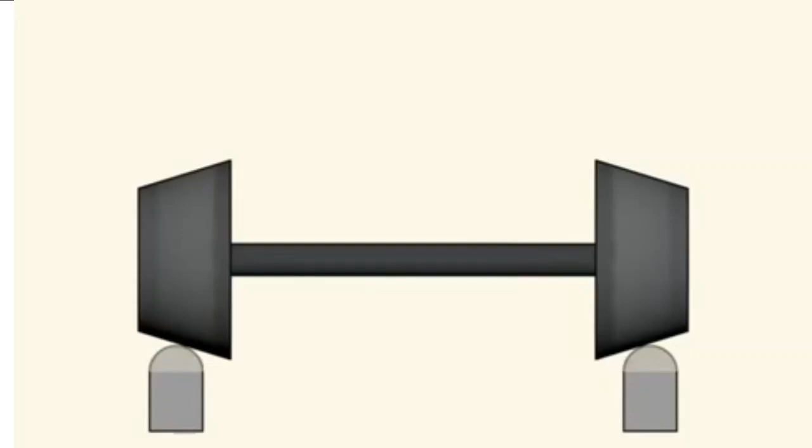Now we will see a video showing what will happen if coning of wheels is not done, and what the result will be if it is done. We can see that if the rails are placed flat, these are the rails.

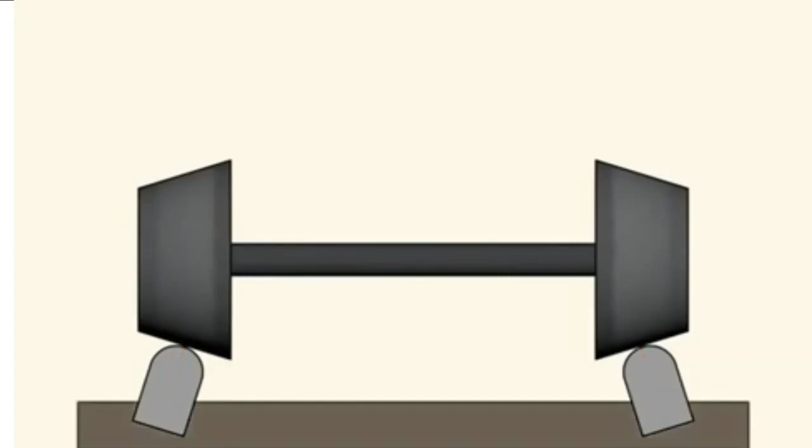If the rails are placed flat, the wheels will fall off and slide off the track. In this figure we can see the axle, the wheels, the wheel flanges, and the wheel treads.

We can see that these wheel treads are given a slope of 1:20. If coning of wheels is not done and only flat wheels are used, at the turns the train may slip off from the track. By coning the wheels, the train stays on the track, takes a smooth turn, and comes back to its original position, maintaining the central position with respect to the track.

So wear and tear of the rails will be minimum if coning of wheels is done. At the turn, the outer wheel is required to take a longer diameter compared to the inner wheel.

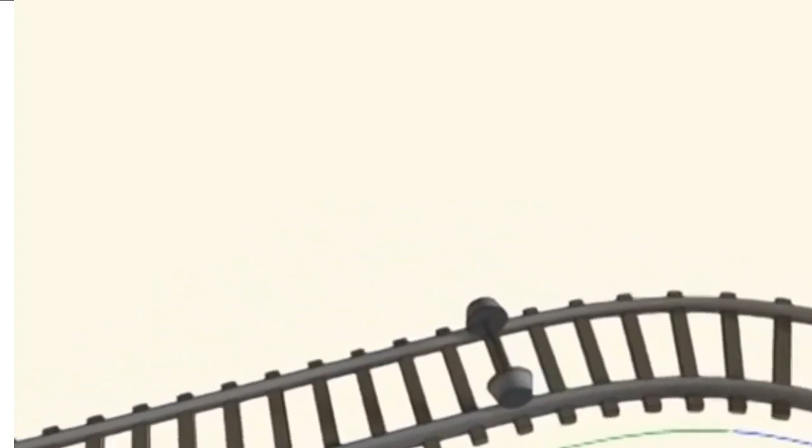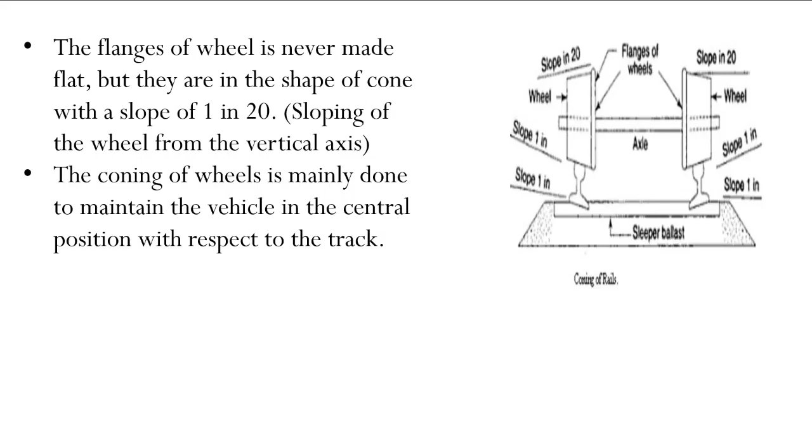Now we will move towards the tilting of rails. We have seen that the rails are not kept flat but tilted inwards. For this method, an inclined base plate is used, inclined with a slope of 1:20, similar to the cone surface of the wheels. What will be the advantage of tilting these rails?

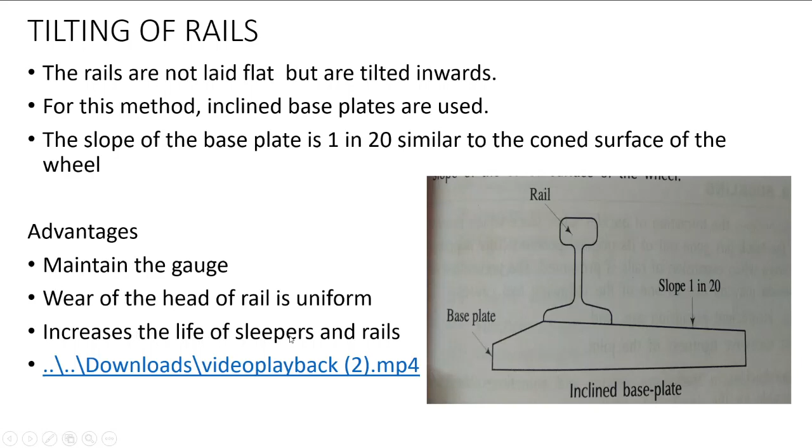The first advantage is that it will maintain the gauge, that is, the inner distance between the inner faces of the rails. The wear of the head of the rail will be uniform if a base plate is provided sloped at 1:20, and it will also increase the life of the sleepers as well as the rails.

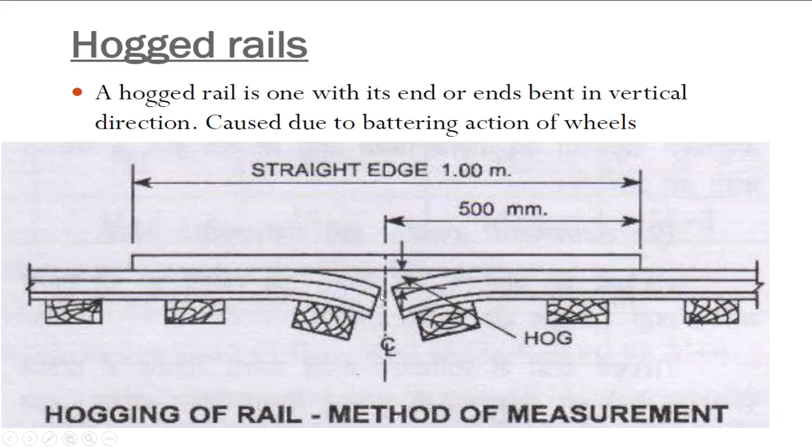So what are the causes of hogging? Why can the hogging effect be seen? It is due to loose packing under the joints and loose fish plates. The hogging effect can be seen in between the two rails, where the rails are attached to each other using joints and loose fish plates. So if the packing between them is very loose, the hogging effect can be seen.

So hogged rails are removed and replaced by new rails. This effect can be eliminated by directly replacing these rails with new rails. Then, second, deflected ends can be brought into their original shape and size by welding.

The second method of reducing hogging is that deflected ends can be brought to original shape by welding. Then deflected ends of the rails are cut off and fresh holes are drilled for fixing the fish plates. The hogged rails can be made into position by cutting the deflected ends of the rails, then freshly making holes using a driller, and then fixing these two rails with a fish plate.

Then the bent or deflected ends of the rails can be straightened. These are the remedies that can be used to prevent hogging, and also, if hogging has occurred, how it can be eliminated. These methods can be used.

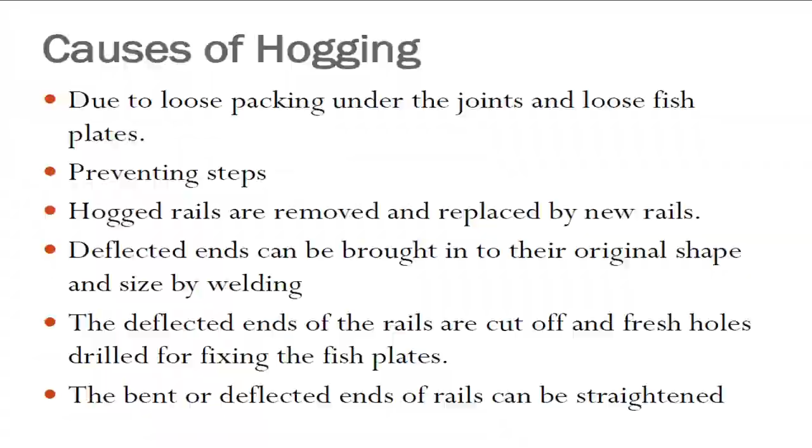So now we will move towards what is wear. We have seen that if coning of wheels is not done, the rails get worn off. So when the axle loads are abnormally heavy and the train moves at a very high speed, concentrated stresses exceed the elastic limits, which results in the wear and tear of the rails.

Depending on the location and position of wear, they are classified as follows. On the basis of location: wear occurs on sharp curves, on gradients, on approaches to the station, and in the tunnel. On the basis of the position: wear on the head of the rail, wear on the ends of the rail, and wear on curves of the rail can be distinguished.

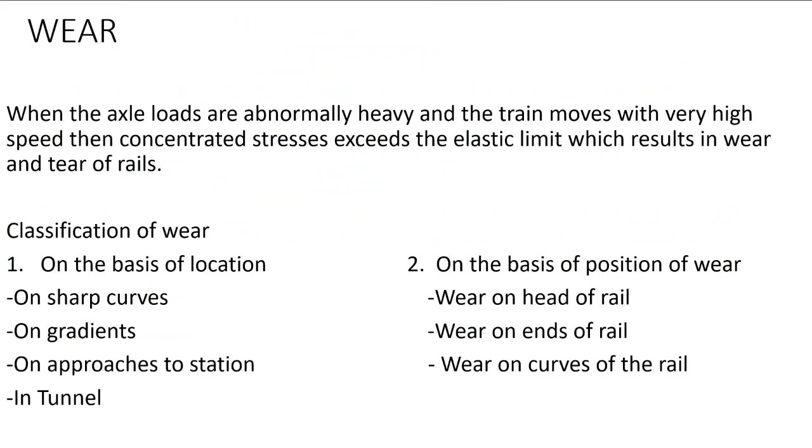So we will see one by one, learning the positions of wear. First, wear on the head of the rail is due to abrasion from moving rails. Due to continuous movement of trains over the rails, abrasion takes place and the head of the rail gets worn off. Secondly, due to the grinding action of sand or dust between the rails and the wheels of the train, the rail head also gets worn off.

Third, when a train starts or applies brakes, the wheel just slides on the rails, causing wear on the head. While stopping the train, brakes are applied, and due to friction this causes wear on the head. Also, the load coming onto a track may exceed the carrying capacity of the section, thus causing wear in the head of the rail. So if the train is overloaded, wear in the head of the rail can be seen.

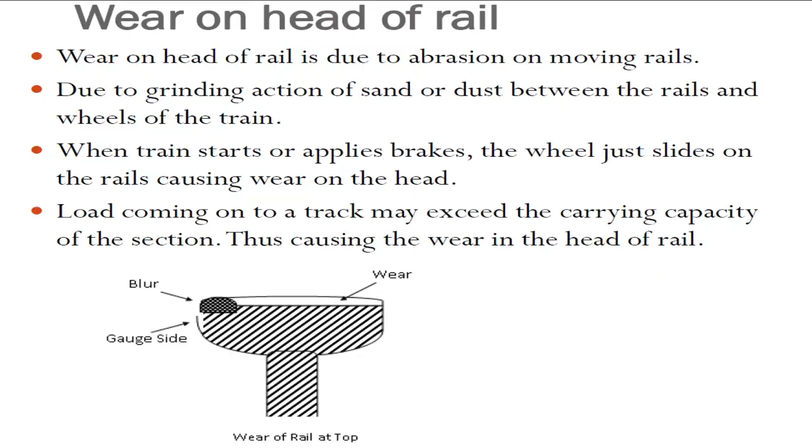Now we will move toward the second one, that is wear on the ends of the rail. It is much greater than the wear on the head of the rail; the wear on the head is minimum, but the wear on the ends is maximum. This type of wear results from the blows the rail receives when the wheel jumps the space between the rail ends.

This type of wheel wear results from when the wheel jumps the space between the rail ends. This space between the rail ends is called the expansion gap. When the wheel jumps this space, wear on the ends is resulted, so the ends get battered by such blows and get hammered.

The contact surface between the sleepers and the rail wears as the effect of these blows increases. Due to this battering of the wheel, the contact between the sleepers and the rail gets disturbed. The ballast under the sleepers loosens due to increased vibrations, and the sleeper depresses due to displacement of the ballast. Also, the fish plates get loose under the constant impact of increasing vibrations.

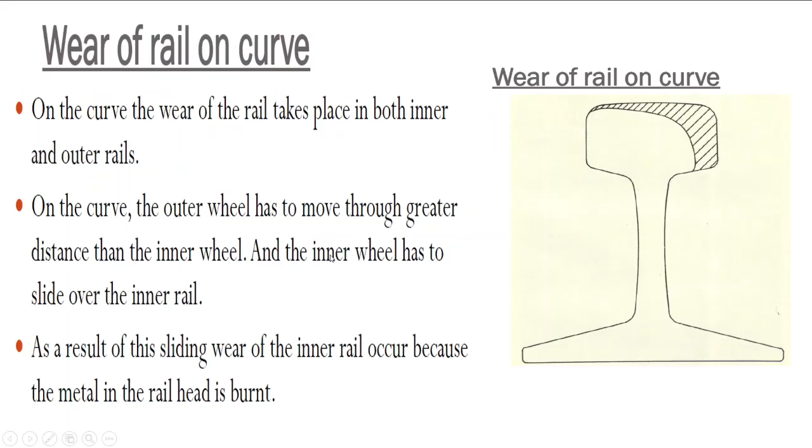Now, how do we know that creep is occurring? The occurrence of creep can be noticed from the following observations: the closing of successive expansion spaces at the rail joints in the direction of the creep. We can see there is a space between the two rails which is called the expansion gap. The closing of successive expansion spaces at the rail joints indicates that creep is occurring in that direction.

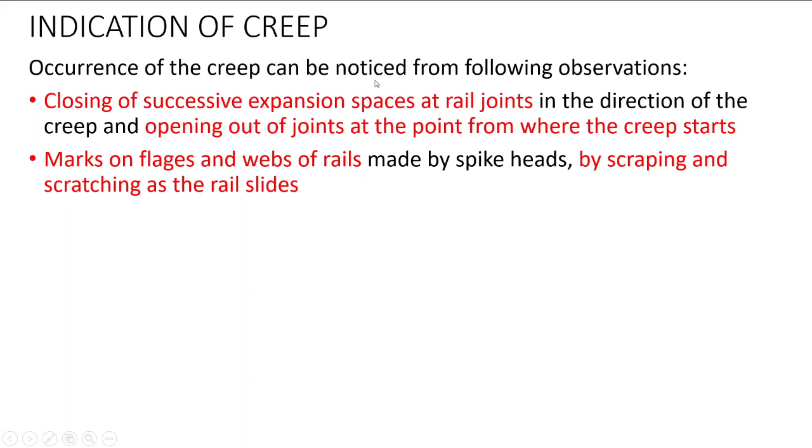When opening of the joints occurs at the point from where the creep starts, we can observe marks on the flanges, that is wheel flanges, and webs of the rail, which are made by the spike heads by scraping and scratching as the rail slides. So if you observe marks on the flanges and webs of the rails, we can conclude that creep has occurred.

So we will see the theories of creep. There are two basic theories: wave theory and percussion theory. In wave theory, a wave motion is set by the moving loads of the wheels.

The vertical reverse curve, that is ABC, is formed ahead of the wheel. The wheel pushes the wave with a tendency to force the rail in the direction of traffic. As the wheel moves, the lift in front of the moving load is carried forward.

This lift, which is at the front of the moving load, is carried forward by the wheel and causes creep, whereas the lift at the rear of the wheel gets back to its normal position. So we can conclude that when the wheel is moving, the lift at the front gets carried in the forward direction, and the lift at the rear gets back to its normal position.

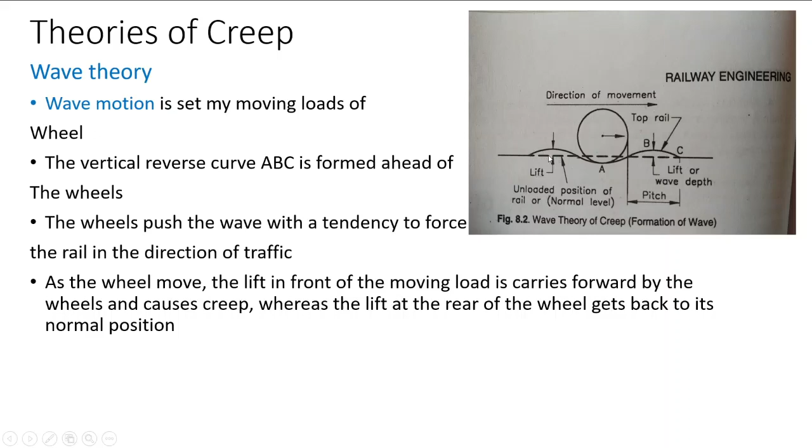Now we will see what percussion theory is. This theory states that creep is due to the impact of wheels at the rail ends, ahead at the joints. The creep is due to the impact of wheels at the rail ends, ahead at joints.

The horizontal component P of R tends to cause the creep. As we know, creep is nothing but the longitudinal movement of rails. This component of R tends to cause the creep, and the component Q tends to bend down the rails, causing hogging of rails.

The creep by this theory will increase due to weak and loose fish bolts. When the fish bolts are fixed very loosely, this creep will occur. When the fish plates get worn out and open, creep occurs. Also, if there is loose packing at the joints and a wide expansion gap, creep will occur.

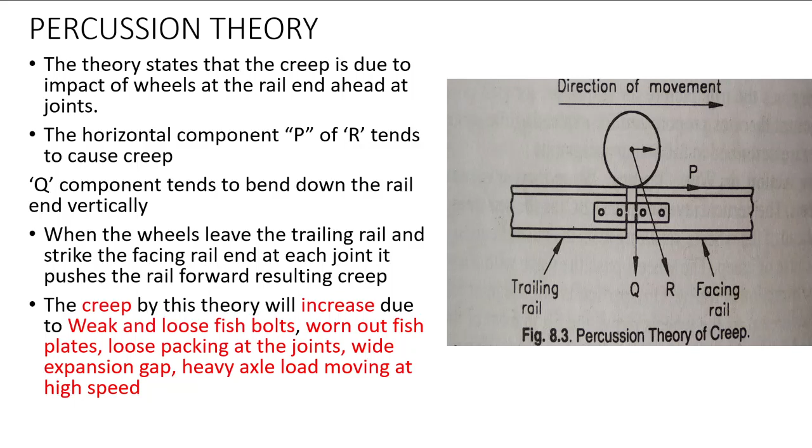Also, when heavy axle load is moving at a higher speed, creep occurs. So we have covered the theories, the percussion theory and wave theory of creep. Now we know the causes of creep, so we will see them one by one.

First, it is due to the wave motion of trains. Second, it is due to the expansion and contraction of rails due to variation in temperature. Third, it is due to starting, accelerating, slowing down and stopping of trains. Then it is due to rail deflection under the moving loads from the wheels.

If heavy traffic is moving only in one direction, the creep is greater on curves, and old rails have more creep. Note this down: old rails have more creep as compared to new rails.

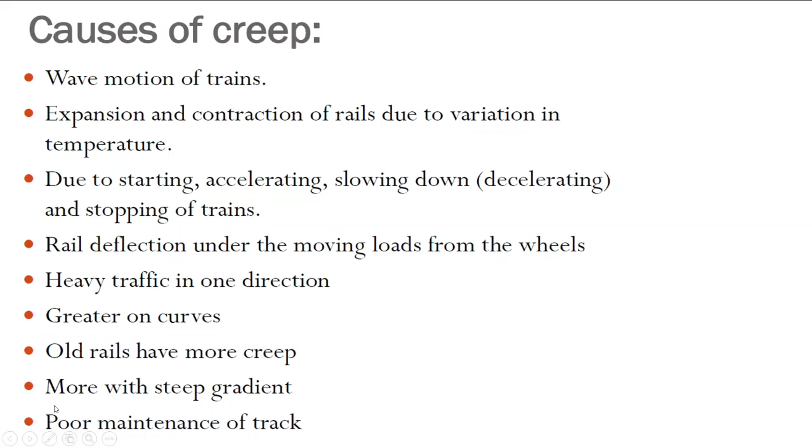Creep is more where steep gradients are present. And when there is poor maintenance of the track, creep will also occur.

So what are the effects of creep? The expansion gap is reduced and buckling of track takes place. What is buckling of track? The track gets out of position.

The sleepers are moved out of square, causing dislocation of all the components of the railway track. Crossing points get disturbed, rail joints are opened, stresses are set up in fish plates and bolts. Movement of switches is made difficult, and also smashing of fish plates and bolts, bending of bars, and kinks at joints occur. These are the effects of creep.

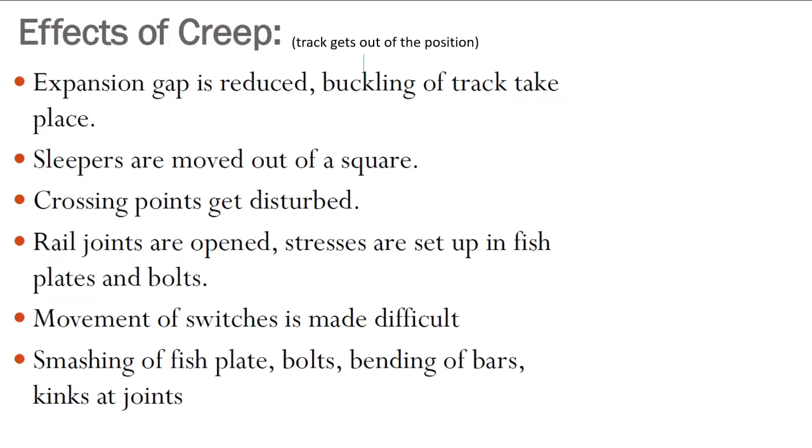In short, creep will affect all components of the railway track. It will dismantle all the components of the railway track.

So how will we prevent the formation or occurrence of creep? By pulling back the rails to their normal, original position, using anchors to hold the rails firmly, using steel sleepers, and ensuring efficient and proper maintenance, we can help prevent creep.

Also, by using angular and heavy ballast, which develops a good interlock, by reducing the space between sleepers, and by using bigger sections of rails, creep can be prevented. So anchors are used to prevent creep.

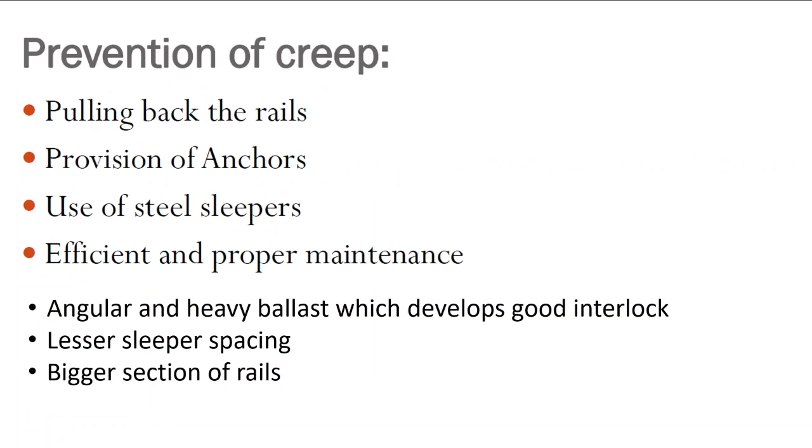Anchors and anti-creepers are the members used to prevent creep, so creep can be checked by using anchors and anti-creepers. Anchors are fastenings which are fixed to the sleepers at the foot of the rail.

Anchors are fixed at required intervals along the rails. This depends upon the traffic, the curve points, and the crossings. Where an anchor has to be fixed depends on the traffic at that location, the curve points, and how many crossings there are.